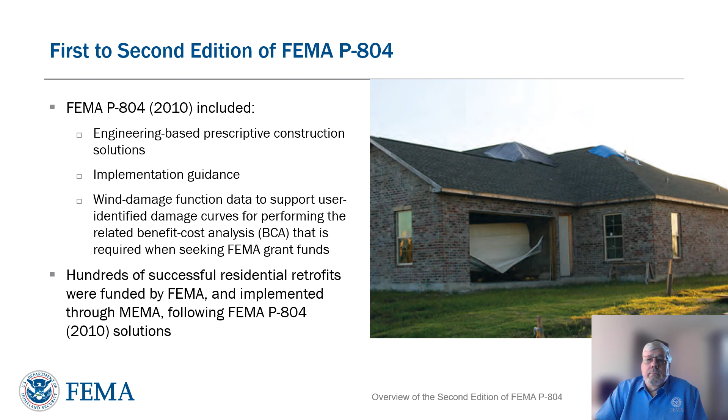Although many advances in building code resilience, adoption, and enforcement were made in Louisiana and nationally between Hurricane Katrina and Hurricane Ida's landfall 16 years later, Hurricane Ida caused damage and catastrophic failures to residential buildings of all ages in August of 2021, even though it was not a design-level wind event. This demonstrated the need for wind retrofit projects to help minimize future damage of residential buildings in hurricane-prone regions.

Therefore, it was decided that additional technical guidance through the update of FEMA P-804 was needed to facilitate the development of wind retrofit projects for residential buildings. The second edition of FEMA P-804 was published in April of 2023 and includes clarified and updated guidance based on post-damage assessments and lessons learned following the destruction hurricanes left behind over the past 12 years of observations, as well as research in the ever-growing field of wind engineering.

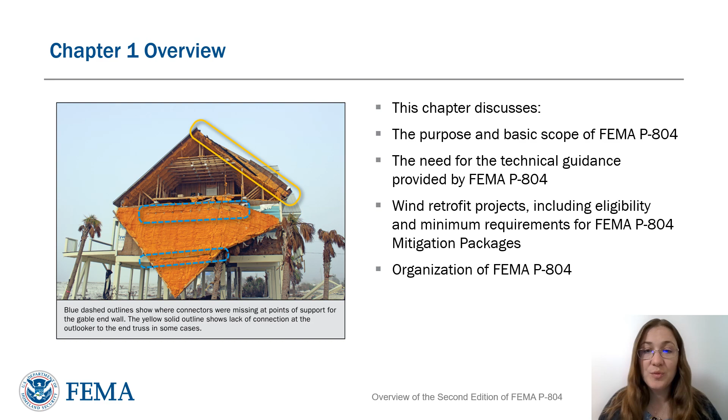The purpose of FEMA P-804 is to provide guidance on how to improve the wind resistance of existing 1- and 2-family dwellings, excluding townhouses and manufactured housing units, in hurricane-prone regions of the United States and its territories. Although the guidance is primarily intended to be applied in hurricane-prone regions as defined by ASCE 7-22, it may also be applied in non-coastal areas subject to high winds.

We've already touched on how every year homes in the hurricane-prone region are subject to high winds that cause extensive damage and threaten the safety and security of residents. But did you know that much of this wind-related damage can be reduced or prevented by improving the performance of homes through retrofits? So how does FEMA P-804 help with this? FEMA P-804 summarizes the technical information needed for selecting and implementing cost-effective FEMA-funded wind retrofit projects for existing 1- and 2-family dwellings in hurricane-prone regions of the United States and its territories.

FEMA's Hazard Mitigation Assistance Grant Program funds wind retrofit projects and requires those projects to meet the criteria in FEMA P-804. We will define and discuss what the hurricane-prone region is in the next chapter.

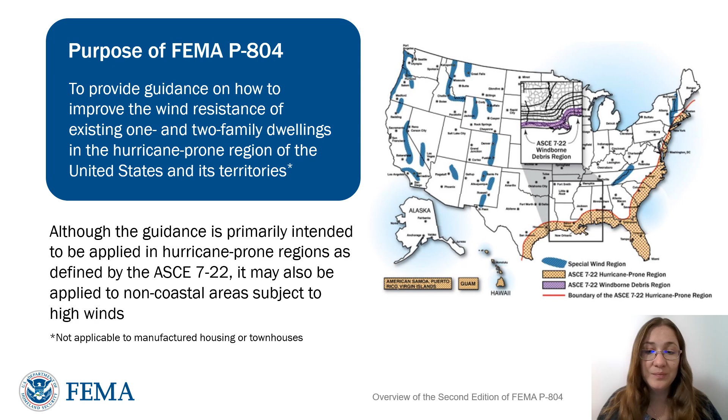Not only do residential wind retrofit projects reduce the vulnerability of and damage to houses from wind, but also from wind-driven rain. Wind-driven rain can occur during a long-duration high wind event such as a hurricane. In fact, FEMA has frequently documented this phenomenon during their mitigation assessment team field deployments after hurricanes. Even though there has been recent evidence of better structural performance for new construction built to more modern building codes, wind-driven rain has consistently caused extensive and costly water intrusion damage when it enters through damaged envelope components. Damaged envelope components can include roof coverings, wall coverings, roof ventilation components, soffits, and windows and doors. FEMA P-804 mitigation packages provide techniques to mitigate against wind-driven rain while also strengthening the structural integrity of the house.

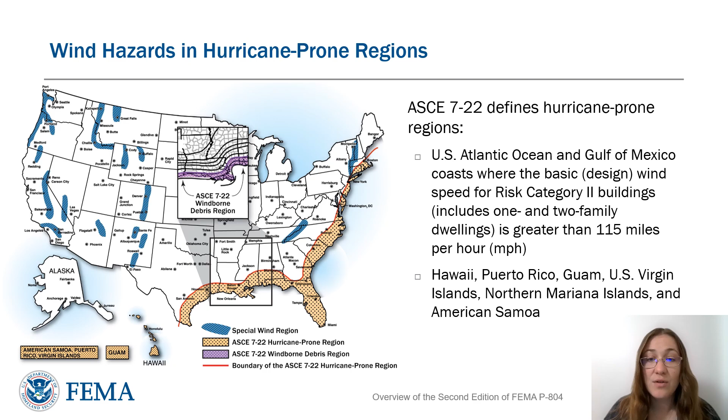High winds can produce large amounts of debris that may become windborne and perforate the building envelope and openings, which allow rain into the building and cause interior water damage. This damage can be extensive and costly and even lead to mold and mildew growth. Furthermore, a window or door perforated by debris may also allow wind pressures to increase within the house, leading to structural damage. Recent FEMA mitigation assessment teams have concluded again and again that wind-driven rain resistance requires special attention in the hurricane-prone region. The mitigation packages in FEMA P-804 take this into account.

While considering grant eligibility, there are no absolute geographical restrictions for where the mitigation packages in FEMA P-804 can be applied. This guidance in FEMA P-804, however, is geared towards houses in the hurricane-prone region. This is not to say some guidance is applicable to areas outside of the hurricane-prone region as well, but the guidance focuses on the unique hazards in the hurricane-prone region discussed on the previous slides.

The first bullet on the slide corresponds to a user note in FEMA P-804 that all wind speeds in the publication correspond to ASCE 7-22 3-second gust basic wind speeds for risk category 2 buildings. 1 and 2 family dwellings are risk category 2 buildings.

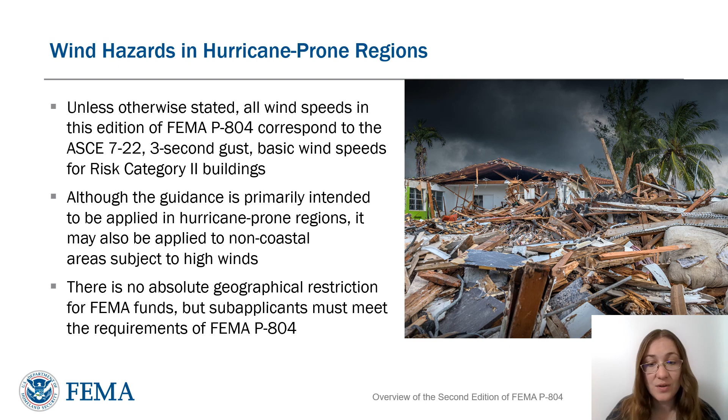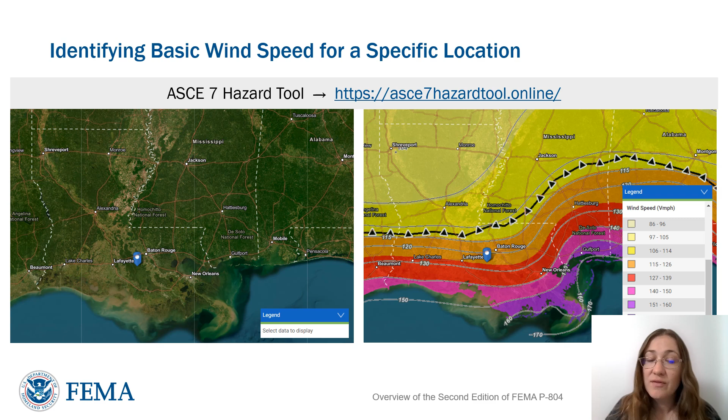One easy-to-use tool for defining the basic wind speed for a location down to the address is the ASCE 7 Hazard Tool. The tool can be accessed via the URL on this slide. Once you are there, you can enter a location and the tool will provide you with the basic wind speed for risk category 2 buildings from ASCE 7-16 and ASCE 7-22.

In addition to defining the risk to a house when considering a wind retrofit project, the existing level of protection of the house should also be determined. Over the past few decades, building codes have progressed towards addressing design and construction practices that will result in buildings that are more resistant to high winds. However, much of the existing building stock in the hurricane-prone region was designed and constructed to codes and standards that required far less than current codes to mitigate wind damage, or were constructed to no code at all. It is important for homeowners to be aware of the limits of the building code used to construct their house, the existing level of risk, and how and to what extent the risk can be mitigated.

Properly designing and constructing a building to a locally adopted building code provides a minimum level of protection for the wind hazard at a particular site for new construction. Homeowners can obtain information about both the effectiveness and limitations of the building code used to construct their house by using the resources listed here.

So how do modern building codes take the risk from wind into account? Many states and communities now regulate the construction of buildings by adopting and enforcing building codes. Most locally adopted building codes in the United States are based on model building codes. The 2021 edition of the model building codes are what FEMA P-804 references.

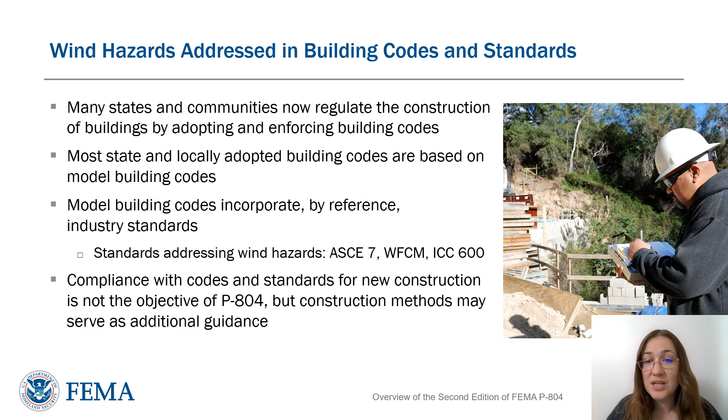The approaches to wind design in these model codes are based on modern wind engineering provisions of ASCE 7, as well as acceptable methods for enhancing wind hazard resistance. When considering residential construction and wind, the IRC also incorporates by reference other industry standards specifically recognized as accepted engineering practice for 1 and 2 family dwellings in high wind regions. Two examples are the American Wood Council's Wood Frame Construction Manual and ICC 600, Standard for Residential Construction in High Wind Regions. While compliance with codes and standards for new construction is not the subject of this guide, construction methods within these documents may serve as additional guidance for improving resistance to high winds.

The level of protection provided by a house can also be increased through the use of best practices. Post-disaster investigations of areas impacted by hurricanes, including those conducted by FEMA MATs, have identified buildings that performed poorly did not have roof and wall coverings capable of resisting high winds or the intrusion of wind-driven rain using sealed roof decks or similar mitigation. Protection for openings, such as windows, doors, garage doors, soffits, and vents to resist high winds, wind-borne debris, and wind-driven rain, applies both inside and outside of the wind-borne debris region. And a continuous load path for all loads, gravity, uplift, and lateral, must be passed from the building envelope to the ground through the foundation.

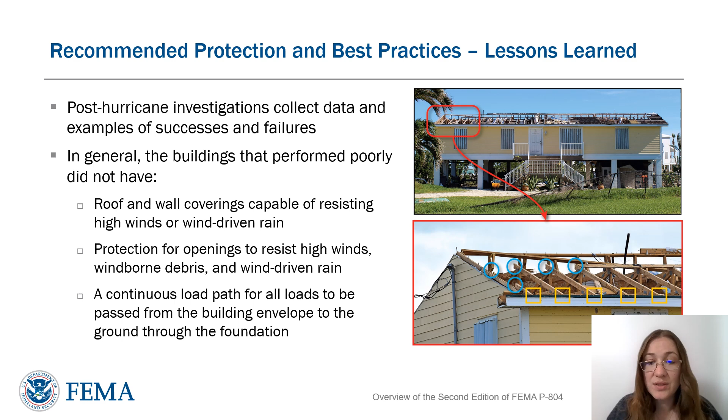FEMA P-804 presents mitigation packages that, if implemented correctly, will reduce the risk of damage to a residential building from a long-duration, high-wind event by avoiding common failure modes discussed on the previous slides, among others. However, there are several factors to consider in the decision-making process to implement wind retrofit measures, such as: is the risk level of the house high enough to make it a good candidate for a wind retrofit project? Which mitigation packages are cost-effective for the desired level of protection for the house? How much risk of wind-related damage is acceptable to the homeowner?

These factors and others are discussed in further detail in Chapters 3, 4, and 5 of FEMA P-804, along with the consideration of cost-effectiveness of mitigation projects. For more information, using FEMA's Benefit Cost Analysis Toolkit, Appendix C of FEMA P-804 provides a step-by-step guide on using the toolkit with the mitigation packages presented in this guide, as well as guidance on pre-calculated benefits.

To execute a successful retrofit on any house, an evaluation of its existing condition should be performed. This section of the presentation will provide an overview of how to do just that, while reviewing Chapter 3 of FEMA P-804 titled Evaluating Existing Houses. No two homes are exactly alike. During this section, we will discuss how to evaluate a home, what to determine when evaluating a home, mitigation package evaluations, developing an evaluation report, and deciding what level of protection to achieve with a retrofit project.

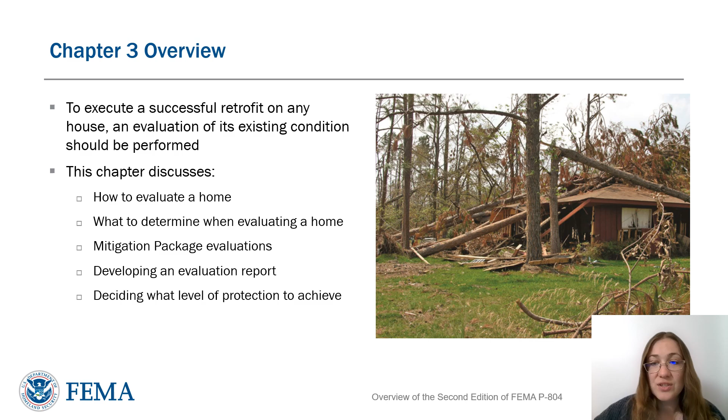IBHS's Fortified program requires evaluations of existing buildings to be performed by a certified Fortified evaluator. Therefore, homeowners who plan to seek FEMA funding for wind retrofits and wish to achieve 2020 Fortified Home Hurricane designation should use a certified Fortified evaluator to coordinate criteria across both programs. IBHS provides an online directory to help property owners find a certified Fortified evaluator on their webpage.

The success of a wind retrofit project depends on thorough evaluations. The purpose of the evaluation is to determine whether the house is a good candidate for any of the wind retrofit mitigation packages.

Regardless of which mitigation package is selected, the evaluation should cover the entire building envelope and conditions that would limit the effectiveness of the wind retrofit project. For example, if the wall covering is deteriorated, damaged, or not sufficiently fastened to the building, implementing a wind retrofit such as replacing windows or strengthening the gable ends will not provide the intended level of performance because other elements are likely to fail.

This example highlights two of the main questions that need to be answered during the evaluation: Do any repairs need to be made before undertaking a retrofit project? And is the house a good candidate for retrofit?

An evaluator should compile available documentation on the design and construction of the house, including upgrades. Any documentation on past evaluations, inspections, or installations should be compiled and noted. A physical walkthrough of the house should be conducted.

Section 3.1, as well as Appendix B of FEMA P-804, provide additional guidance on evaluating buildings before starting a wind retrofit project, including what should be documented in the building evaluation.

At the end of the collection of data and walkthrough, an evaluation report should be generated. The evaluation report should provide all reasoning and data used to support or not support the feasibility of the house for possible retrofit. More details on the evaluation report and what should be contained in it will be discussed at the end of this section.

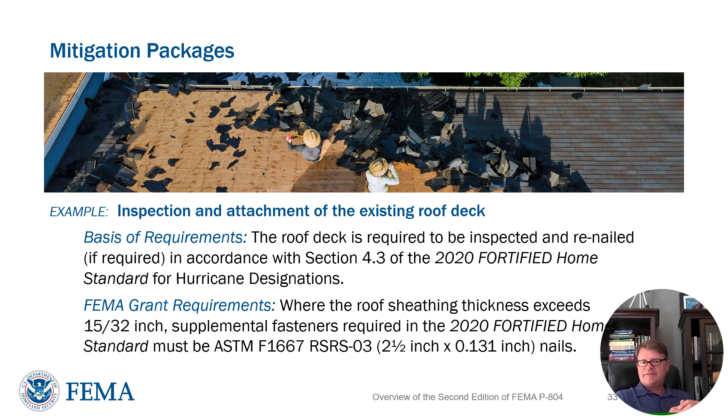The topics we're going to discuss: we're going to look at the key requirements in each mitigation package. We're not going to go through every single detail about every mitigation package, but we are going to discuss the key ones. Not all of them are going to be covered here. One of the most important things you can probably get from this presentation is that it's really important that you read all of what's in Chapter 4 of this guide and all of what's in the Fortified Home Standard. You can't use one without the other.

They're intended to work together. There are key things from P-804 that are going to apply to the project, and there are key things from the Fortified Home Standard that are going to apply as well. You need both of them. You can't have one without the other for a particular project complying with P-804.

We'll talk a little bit about the limitations of prescriptive solutions. There are a number of prescriptive solutions within Fortified, and there are also a couple of other ones in the I-codes that are referenced by P-804. What those limitations are.

They're usually limited by wind speed, exposure category, but they also may be limited by building mean roof height and some other geometric factors as well. And then also there's minimum design requirements and testing requirements. So for example, if something has to be designed by a registered design professional, there's a minimum wind speed and minimum exposure category for a lot of the retrofits, not all of them, but for some of them.

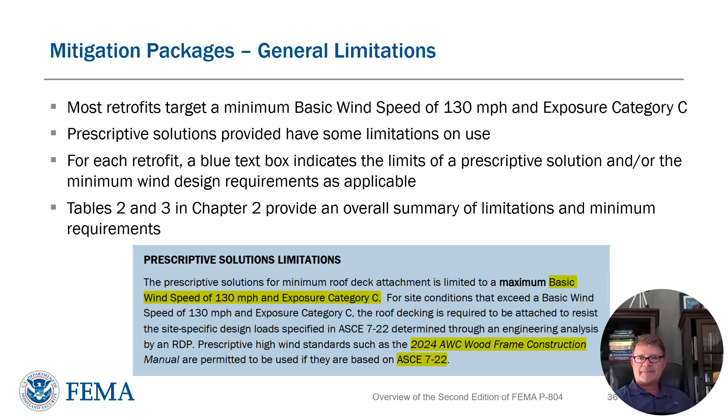Let's talk a little bit about exposure categories, because you'll see exposure categories mentioned in P-804. You'll also see it mentioned in IBHS fortified standard. What exactly do these exposure categories mean?

Exposure categories, from a wind design standpoint, are really a way to capture what the roughness of the Earth's surface is. The rougher the surface, the more it affects the flow of air as wind blows over the Earth's surface. The less rough, the less it affects the air, and all things being equal, the higher wind speeds will be a little bit higher for less rough surfaces than a similar type event for more rough surfaces.

We account for these differences in roughness by defining 3 exposure categories: exposure category B, exposure category C, and exposure category D. We'll talk about exposure category D on the next slide. What we have in P-804 are general descriptions of exposure categories. You'll really need to go to ASCE 7 to get the more specific details about how to determine what exposure category the site is in, and it can be a little bit complicated. But these general definitions we provide here are intended to just give you an idea of the types of exposure categories that would apply in the hurricane-prone region.

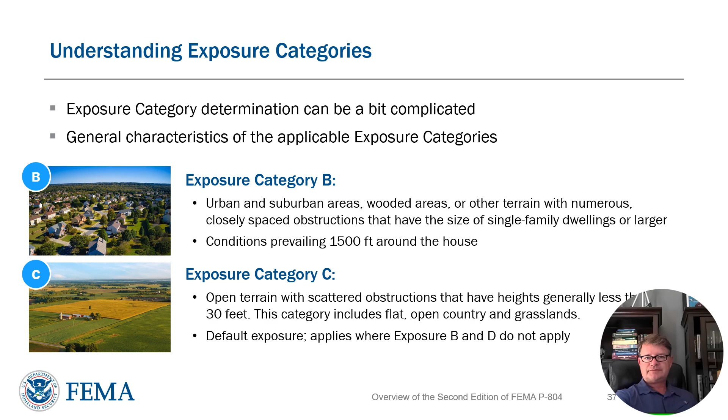Exposure category D is the condition where a building is exposed to wind flowing over open water. It has to be a large body of water, with a width of at least 5,000 feet, and that exposure D condition extends inland, or downwind if you will, for a distance of 600 feet or 20 times the height of the building. Now, for single-family dwellings, for houses, the 600-foot transition is what's going to control. So if you're located within 600 feet of a body of water that's at least 5,000 feet in width, then you're going to qualify for exposure category D.

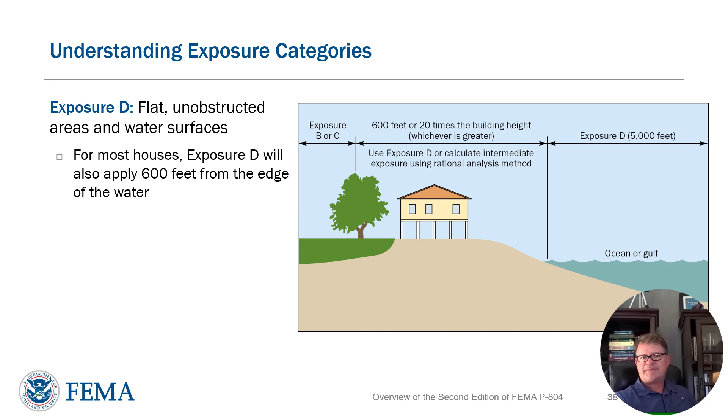All right, so let's get into some of the nuts and bolts of the mitigation packages. We'll start with the basic mitigation package. As the title indicates, it is the most basic package of the packages in P-804. It focuses on securing the roof components, such as the roof covering, the roof decking, and underlayment, depending on which option you choose, and also improving the water intrusion resistance of the roof. The basic mitigation package generally does not require the use of a registered design professional, such as an engineer or architect, to complete. Now, there are 2 options.

There's option 1, which applies where the existing roof covering is not being removed. There's a set of improvements that are recommended for option 1, and then option 2 would apply where the roof covering is being removed and replaced. Generally, option 2 is the preferred method for a couple of reasons. One is when you remove and replace the roof covering, you have access to inspect the roof deck, check the fastener size, fastener spacing, also look for any rot or deteriorated roof decking. And secondly, when you remove the old roof covering, you're going to put a new roof covering on, and it's going to be fastened and meet current building code requirements at the minimum level required by P-804 and fortified.

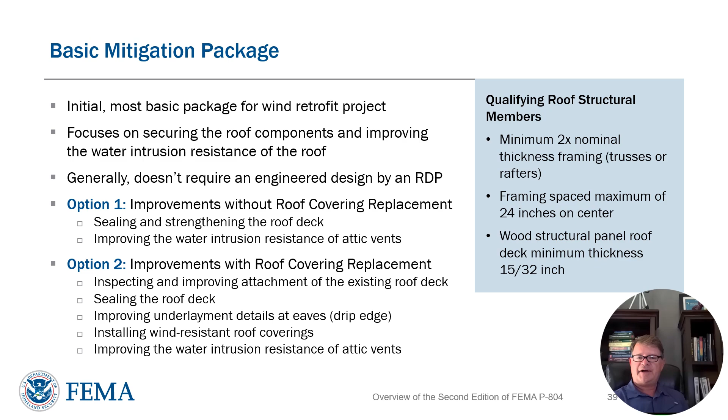All right, basic mitigation package option 1. Again, this one applies where the roof covering is not being removed and replaced. So if we got to strengthen and seal the roof deck and the roof covering is staying in place, we're going to have to strengthen and seal it from the underside of the deck instead of on the top, like we will with option 2, as we'll see in a few minutes.

But we do this on the underside by applying a 2-part spray polyurethane foam adhesive in the attic to the underside of the roof deck. It's very important that that spray polyurethane foam adhesive be applied in essentially every nook and cranny in the attic. It needs to be applied at the roof deck, at the joints between the roof sheathing panels, and all intersections between the roof deck and roof framing members. Now, this type of adhesive has specific performance requirements identified regarding core density and design uplift pressure that the product has to be capable of resisting. But that foam adhesive for basic mitigation option 1 is going to be used to seal and strengthen the roof deck.

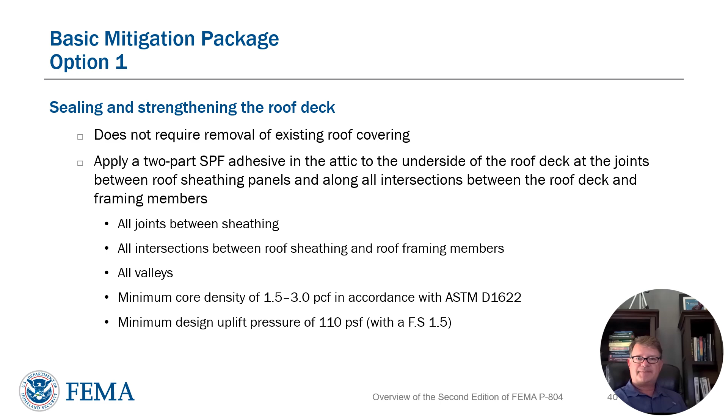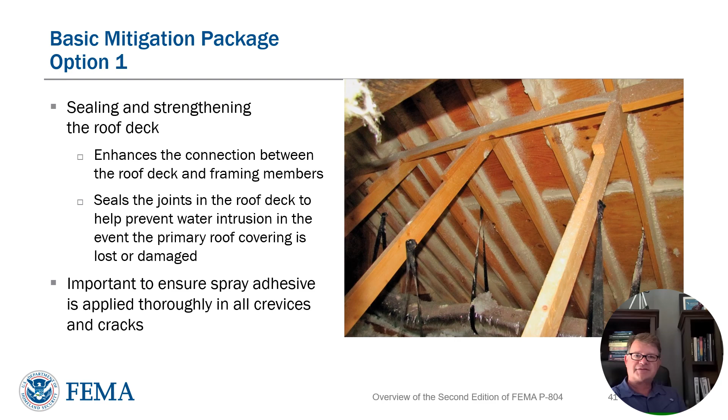Sealing those joints is what's going to help prevent water intrusion in the event that the primary roof covering is lost. The final thing you have to do with option 1 relates to protecting ventilation components into the attic. Up until a few years ago, most attics had some type of ventilation, and many still do, although the unventilated or unvented attic option is becoming increasingly popular. These ventilation components can allow wind and wind-driven rain to come into the attic area, so they have to be protected in some form or fashion.

Ridge vents and off-ridge vents are required to be tested in accordance with a Florida standard called TAS 100A. It comes from the high velocity hurricane zone in the Florida Building Code, which is Dade and Broward counties, or the old South Florida Building Code. TAS 100A tests these attic ventilation components for wind-driven rain. So for basic option 1, ridge and off-ridge vents will have to be tested to TAS 100A.

Now for gable end vents, they're required to be protected with a removable shutter, which will also protect from wind-driven rain entering the attic area. There is a prescriptive solution within Fortified for using wood structural panel to cover gable end vents.

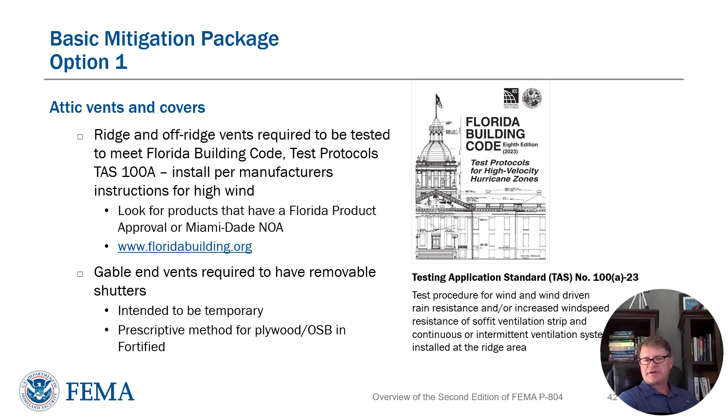Option 2 of the basic mitigation package is a little bit more involved than option 1. In option 2, we're removing the existing roof covering, so we have access to the roof deck, and we can inspect the deck thickness and the fastening of the deck to the roof framing.

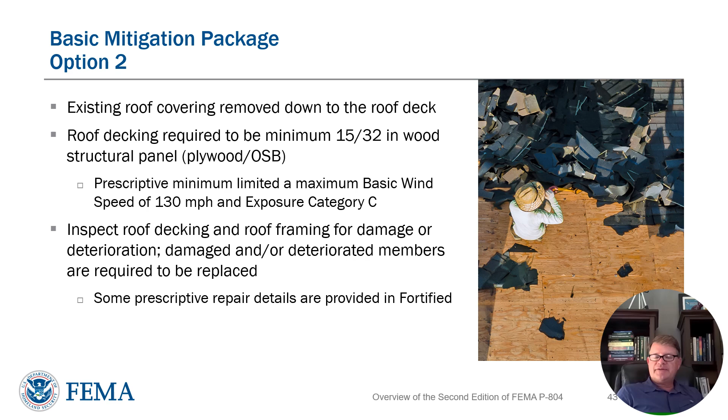For option 2, the roof deck has to be a minimum of 15/32 inch wood structural panel, which is plywood or OSB. That minimum thickness is predicated on a basic wind speed of 130 miles per hour and exposure category C. For site conditions that exceed that, you'll need to use a registered design professional or one of the prescriptive standards, such as the Wood Frame Construction Manual, based on ASCE 7-22, to determine the minimum roof deck thickness. You'll also want to inspect the roof deck for any damage or deterioration. Look for water damage. There are some prescriptive repair options within Fortified that may be used for certain conditions.

One of the key elements of option 2 of the basic mitigation package is securing the roof deck. The roof deck will have to be secured by adding additional fasteners, or re-nailed, as it's called. These additional fasteners are 2 3/8 inch long ring shank nails, and they are to be spaced at 4 inches on center throughout the entire roof. If the existing roof can be shown to meet these requirements, then this re-nailing is not required.

Now, there is a FEMA grant requirement on this retrofit. Where the roof sheathing thickness exceeds 15/32 of an inch, FEMA P-804 requires the use of a 2.5 inch long ring shank nail, called the RSRS03 nail. But that only applies where the roof sheathing thickness exceeds 15/32 of an inch. Where it's 15/32 of an inch, it's not allowed to be less, but the 2 3/8 ring shank nail, as specified by Fortified, can be used.

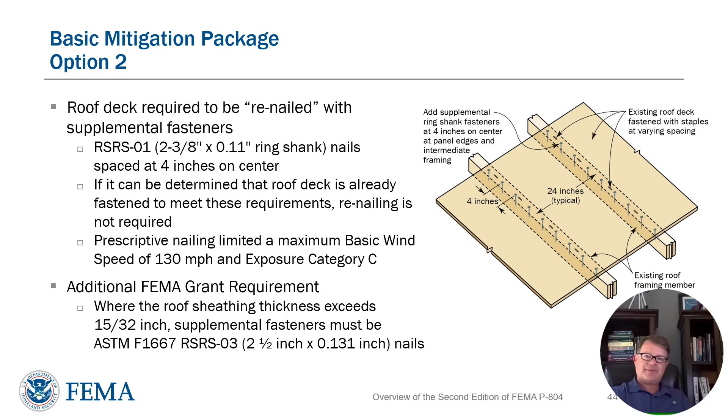After securing the roof deck, the next retrofit is to seal the roof deck. When the primary roof covering is lost or damaged, the roof deck becomes particularly susceptible to water damage due to gaps between the decking. Employing a sealed roof deck will significantly reduce water intrusion through the roof deck when the primary roof covering is lost or damaged.

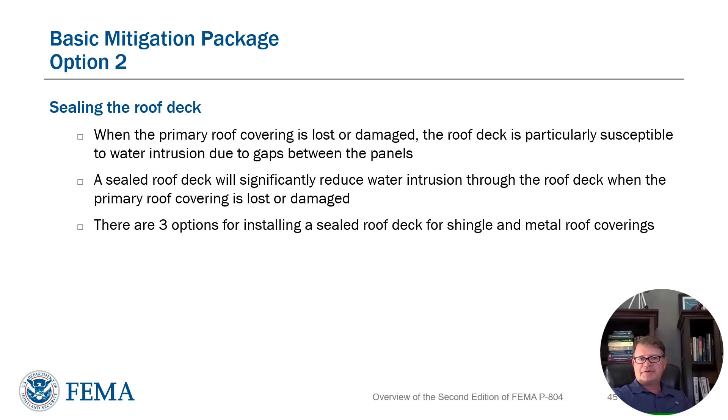In P-804 and Fortified, there are 3 options for installing a sealed roof deck for asphalt, shingle, and metal roof coverings. Sealed roof deck option 1 includes a combination of traditional roofing underlayment materials and a 4-inch wide strip of self-adhering tape covering all joints in the roof deck.

This tape is required to comply with ASTM 1970 or AAMA 711. The tape is required to be covered with felt underlayment, complying with ASTM 226 Type 2 or ASTM 4869 Type 3 or Type 4. This underlayment is required to be fastened at all laps at 6 inches on center, and in between laps at 12 inches on center in a 12-inch grid pattern. The fastener specified is a ring shank fastener using metal or plastic caps.

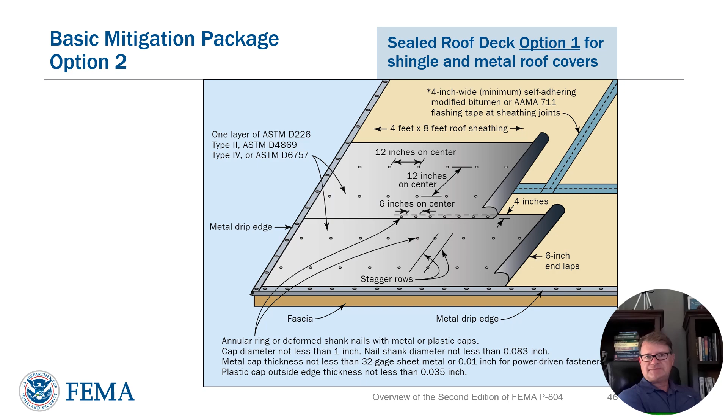Option 2 for sealing the roof deck for shingle and metal roof covers is very similar to historically how underlayment has been applied to low slope roofs. It essentially requires a double layer system of underlayment.

Underlayment has to comply with ASTM D226 Type 2 or ASTM D4869 Type 3 or Type 4, and it's applied in a fashion where the entire roof is covered with a minimum of 2 layers of underlayment. The underlayment is fastened at the laps at 6 inches on center, and then in a 12-inch grid pattern between the laps. The type of fastener required is very similar to what we described for option 1. It's a ring shank roofing nail using metal or plastic caps.

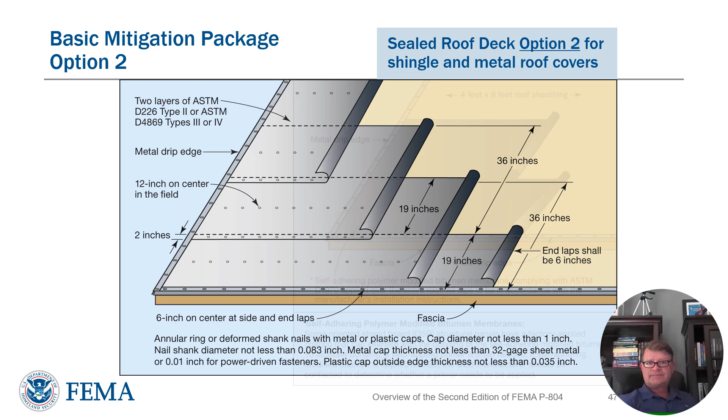Option 3 for sealing the roof deck is really the most popular method that's used to seal the roof deck. It requires the use of a polymer modified bitumen product that complies with ASTM D 1970, and it adheres directly to the roof deck. Testing by IBHS has shown that this method is one of, if not the most effective method in reducing water intrusion through the roof when the primary roof covering is lost or damaged due to a windstorm.

You will have to pay attention if the roof deck is OSB. Many OSB manufacturers apply a coating in the factory to their product, and this coating can inhibit the ability of the self-adhered product to bond to the deck. So in a lot of cases, you're going to have to apply a primer. You'll need to contact the OSB manufacturer, determine if a primer is required, and determine what type of primer you will need.

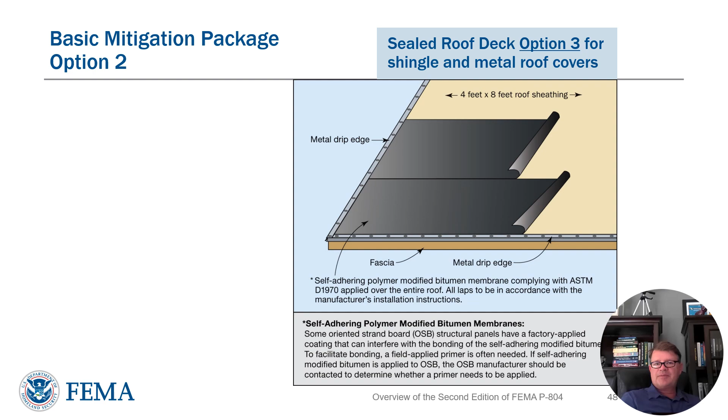The last couple of slides we've talked about sealed roof deck options for shingle and metal roof coverings. For tile roofs, the options for sealing the roof deck are very similar. Option 1 includes a combination of taping the joints with a self-adhered product complying with ASTM D 1970 or AAMA 711, and an anchor sheet, and then a self-adhered cap sheet. Option 2 involves the use of a self-adhered underlayment applied directly to the deck.

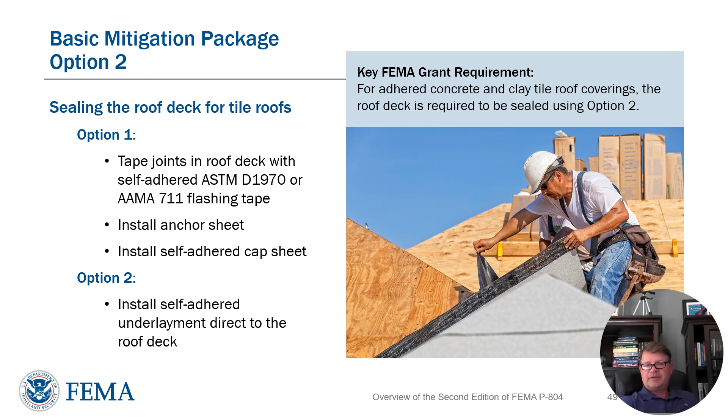There's a notable FEMA grant requirement that pertains to tile roofs. That is that for adhered concrete and clay roof tile, sealed roof deck option 2, the self-adhered underlayment direct to deck, will have to be used.

After the sealed roof deck is installed, a drip edge is required at all eaves and all rakes. The drip edge is required to be installed over the underlayment and fastened at 4 inches on center. The drip edge is also required to be sealed with a compatible sealant or compatible cement. For asphalt shingle roofs, a self-adhered starter strip is also permitted to be used.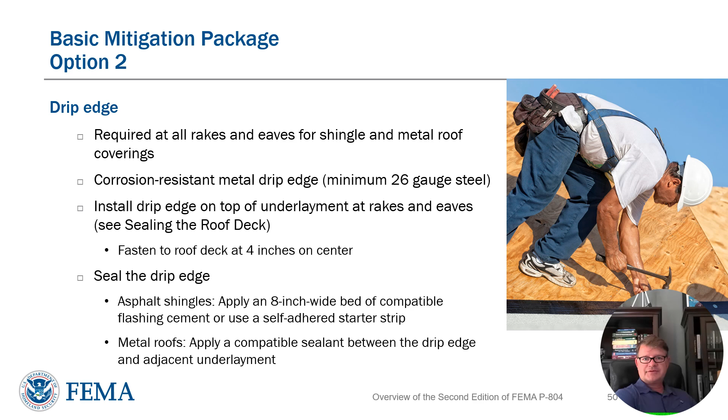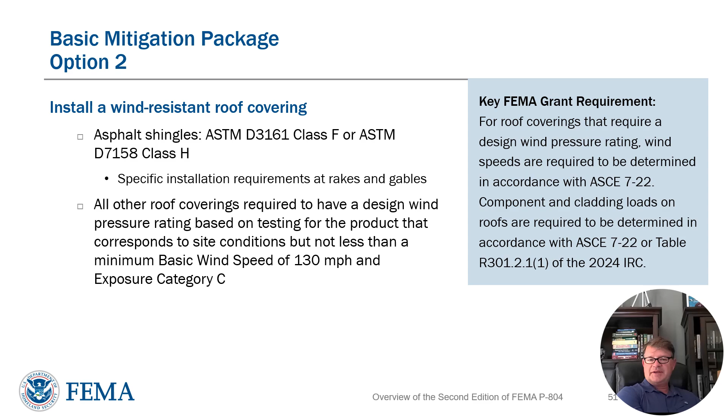Next, a wind-resistant roof covering is required to be installed. Asphalt shingles are required to comply with ASTM D3161 Class F or ASTM D7158 Class H. All other roof coverings are required to have a design wind pressure rating that equals or exceeds the site conditions, but not less than the design pressures based on a basic wind speed of 130 miles per hour and an exposure category C. An important FEMA grant requirement to this section is that wind speeds have to be determined in accordance with ASCE 7-22.

The final retrofit for option 2 of the basic mitigation package is the same as the final retrofit for option 1 in the basic mitigation packages, in that the attic ventilation openings need to be protected. Ridge and off-ridge vents will have to be tested in accordance with TAS 100A. We talked about that on a previous slide. And then also gable end vents need to be covered with a removable shutter.

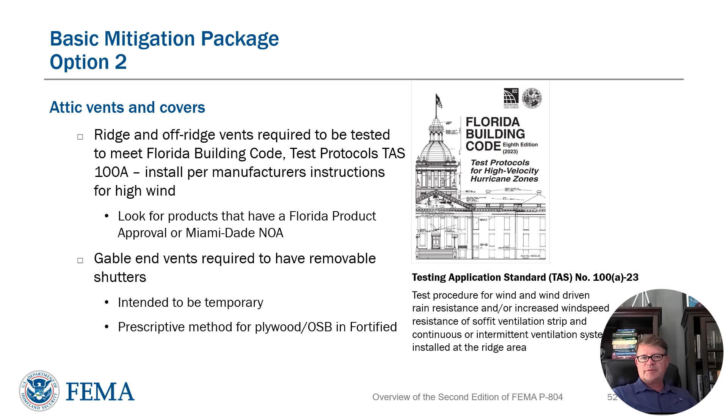Now let's talk about the intermediate mitigation package. The intermediate mitigation package builds on the basic mitigation package. Whereas the basic package primarily covered retrofits for roofs, the intermediate mitigation package is a set of structural retrofits. This package includes protecting windows and doors from windborne debris, installing wind-resistant garage doors, protecting garage doors with glazing from windborne debris, strengthening gabled end walls, strengthening soffits, strengthening chimney attachments, and strengthening connections of attached structures.

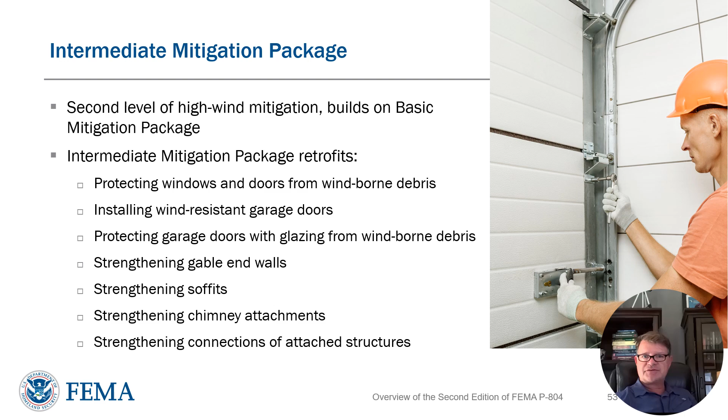Let's talk a little bit about opening protection from windborne debris. FEMA P-804 and Fortified require all windows, skylights, entry doors, and garage doors with glazing to be protected from windborne debris. This protection can be in the form of an impact-resistant product, such as an impact-resistant window or door, or it can be an impact-resistant covering that protects a window or a door.

The impact-resistant products or coverings have to be tested in accordance with ASTM E1886 and ASTM E1996, or the Florida Building Code Test Protocols TAS 201 and TAS 203.

There's a key FEMA grant requirement related to opening protection. While Fortified permits the use of wood structural panels for protection of windows where the basic wind speed is less than 130 miles per hour, P-804 does not allow wood structural panels, which could be OSB or plywood, to be used as protection for any basic wind speed.

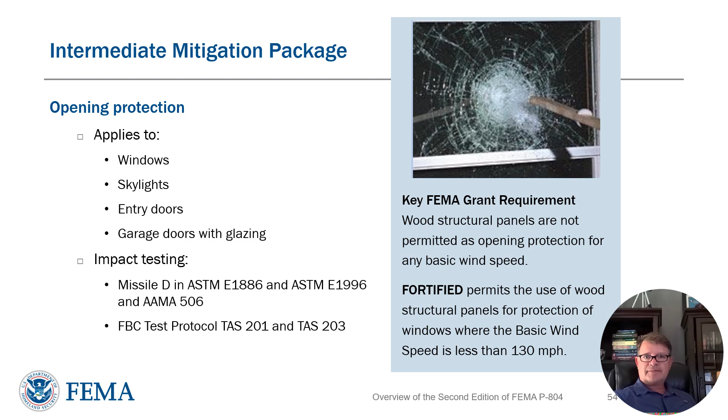For impact-resistant products and coverings, it's important that the product labels are maintained until the retrofits have been inspected. Some products have permanent labels and others have temporary labels that can be removed. It will be difficult to verify that the product is impact-resistant without a label. The image on the right of this slide is a typical impact-resistant window label.

This is a temporary label and it can be removed. It tells us that the product was tested to ASTM E1886 and ASTM E1996 using Missile D. It also indicates other important information about the product, including its design wind pressure rating.

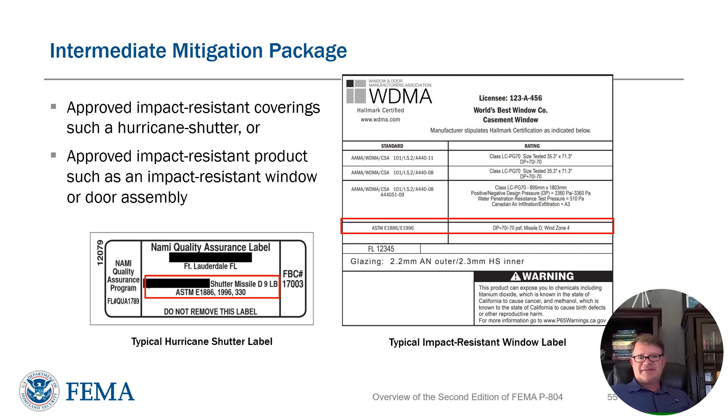The image on the left is a typical label for a hurricane shutter. It also indicates that this product was tested to ASTM E1886 and ASTM E1996.

While the intermediate mitigation package requires garage doors with glazing to be protected from windborne debris, it also requires all garage doors with or without glazing to have a design wind pressure rating for the site condition, but not less than a basic wind speed of 130 miles per hour and exposure category C.

Similar to windows and shutters, building codes require garage doors to have a label indicating certain performance requirements. A typical garage door label is shown on this slide. This label indicates that this garage door has a design wind pressure rating of positive 30 psf and negative 33 psf. It also indicates that this door is impact rated in accordance with ANSI DASMA 115, which is the impact standard for garage doors.

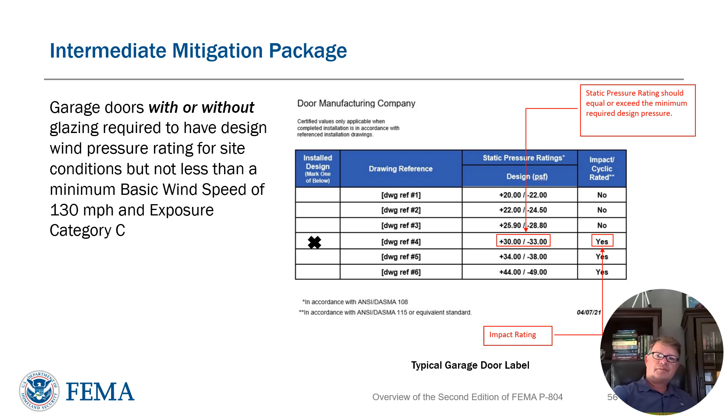Gable end wall retrofits are an important part of the intermediate mitigation package. Gable end walls are particularly vulnerable to out-of-plane wind loads because of the hinge created at the intersection of the triangular portion of the gable and the top of the wall below.

Gable end wall bracing will typically need to be designed by a registered design professional. The bracing method chosen must be capable of resisting wind loads for the site conditions, but not less than a minimum basic wind speed of 130 miles per hour and exposure category C.

Prescriptive solutions are permitted in accordance with Appendix C of the 2024 IEBC or Chapter 17 of the 7th edition 2020 Florida Building Code Existing Building. However, FEMA grant requirements apply an extensive set of limitations on using the prescriptive solutions. We'll discuss some of these limitations on the next few slides. If any of these limitations are exceeded, design of the bracing by a registered design professional is required.

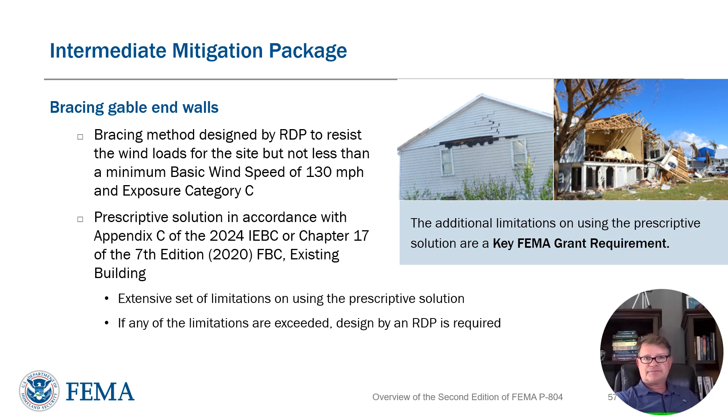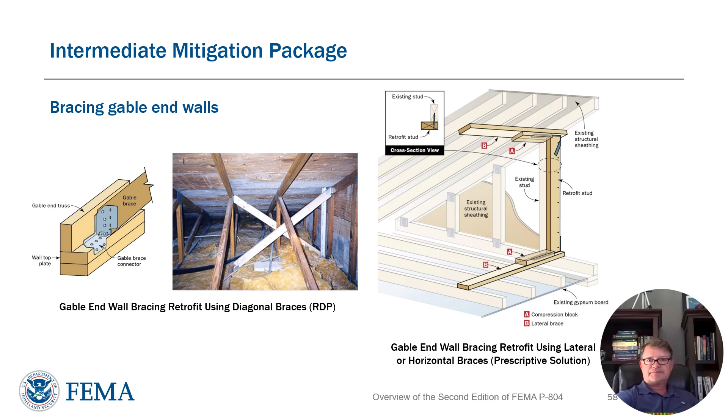As previously mentioned, there's an extensive set of limitations on using the prescriptive solution in the 2024 IEBC or the 7th edition 2020 Florida Building Code Existing Building that fall under FEMA grant requirements. General eligibility conditions are covered in Appendix C of the IEBC and Chapter 17 of the Florida Building Code Existing Building. If these eligibility conditions are not met, the prescriptive solutions cannot be used.

Additional limits for FEMA grant requirements include: the mean roof height cannot exceed 33 feet, the site condition is limited to exposure category B or C, and the height of the wall beneath the gable cannot exceed 10 feet. Where a gypsum board ceiling diaphragm is used to brace the gable end wall, the minimum length of the gypsum board ceiling diaphragm is required to be in accordance with Table 4, which we'll take a look at in a few minutes.

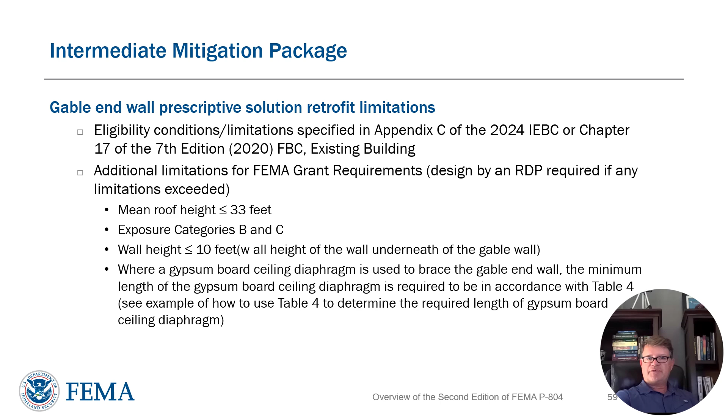Further limitations include that fastening and blocking of the gypsum board ceiling is required to be verified or retrofitted to meet the minimum criteria specified in the 2024 International Residential Code for gypsum board diaphragm ceiling assemblies. The horizontal braces specified in the 2024 IEBC are required to be continuous along the required length of ceiling diaphragm as determined by Table 4, or be spliced together as permitted for interrupted horizontal braces along the required length of the ceiling diaphragm as determined by Table 4.

Similarly, the lateral braces specified by the 7th edition 2020 Florida Building Code Existing Building are required to be continuous along the required length of the ceiling diaphragm as determined by Table 4, or be spliced together as permitted for interrupted lateral braces along the required length of the ceiling diaphragm as determined by Table 4.

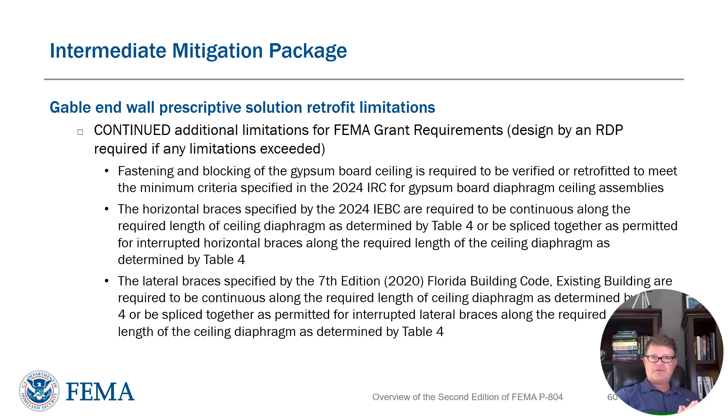Now let's take a look at Table 4.

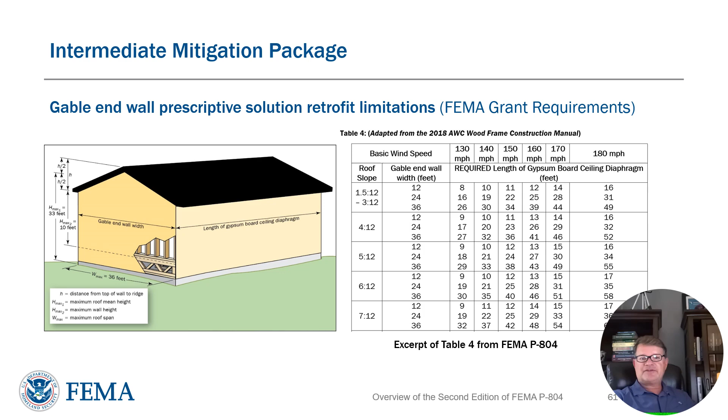For example, a building with a roof slope of 5 and 12, located where the basic wind speed is 150 miles per hour, and having a gable end width of 24 feet, would require a minimum gypsum board ceiling diaphragm length of 24 feet. Again, if any of these limitations specified in the FEMA grant requirements or the eligibility conditions specified in the 2024 IEBC or the 7th edition 2020 Florida Building Code Existing Building are exceeded, the prescriptive solution is not permitted to be used, and gable end wall bracing will have to be designed by a registered design professional.

All right, next let's talk about retrofitting soffits. The poor performance of soffits continues to be an issue in windstorms such as hurricanes. When soffit panels fail, wind and wind-driven rain can enter the attic area and cause significant interior water damage to a home. Recently, building code requirements have been strengthened to improve soffit performance. These building code changes generally align with the retrofit requirements in FEMA P-804.

For the intermediate package, the condition of the existing soffit, if present, should be evaluated. If it's in good condition, the existing soffit can be used if it can be determined that it is capable of resisting wind loads for the site, but not less than wind loads determined using a wind speed of 130 miles per hour and exposure category C. Admittedly, this will be difficult to determine for many soffits.

If the soffit is constructed of wood structural panels, the panel thickness, nail size, and spacing can likely be determined and can be analyzed for wind load resistance. However, other soffit panel products such as vinyl or fiber cement board are typically not labeled. Without some type of label on the product, it will be difficult to determine the wind load resistance of a soffit panel product. While Fortified permits the existing soffit panel to be used if it is in good condition, a FEMA grant requirement in P-804...

...requires the soffit panel to be capable of resisting wind loads for the site, but not less than wind loads determined using a basic wind speed of 130 miles per hour and exposure category C, regardless of the condition of the existing soffit. Additionally, aluminum soffit panels are not permitted to be used within 3,000 feet of the coast due to the corrosive effects of salt-laden air.

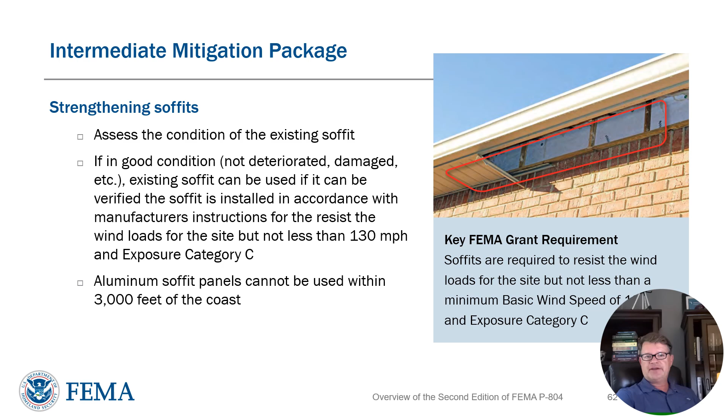To reiterate, if the manufacturer of the soffit panel cannot be identified, so that you can verify that the panel meets the minimum design wind load specified in P-804, or if it's not in good condition, the soffit will have to be replaced. The new soffit panels must be capable of resisting a design wind pressure for the site, but not less than wind loads associated with a basic wind speed of 130 miles per hour and exposure category C.

The design wind loads on soffits will have to be determined using ASCE 7-22, or alternatively, the simplified method in Table R301.2.1(1), in the 2024 IRC could also be used. Soffit must be attached at both ends, meaning at the wall and at the fascia board. And if the soffit span exceeds 12 inches, intermediate supports are required so that no span of the soffit exceeds 12 inches.

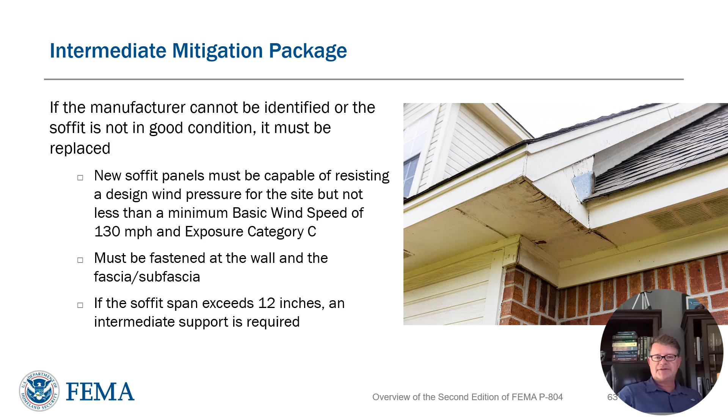A few important notes about vinyl soffit panels. The use of vinyl soffit panels is common because they are inexpensive and relatively easy to install. However, there are a couple of key installation requirements I'd like to share with you.

Vinyl soffit panels are required to be fastened at both ends of the soffit panel, meaning at the fascia board and at the wall to framing or some other wood support such as a ledger. It is common practice to only fasten the soffit at the fascia board and float the other end of the panel in a vinyl siding accessory channel. While this method is common because it's easy to install, it does not offer good resistance to wind loads, as has been noted by numerous FEMA MAT reports.

Another key issue for vinyl soffit panels is the span of the panel, the distance from the wall to the fascia board. If this distance exceeds 12 inches, intermediate supports are required to be provided so that the soffit panel span does not exceed 12 inches.

For wood structural panel soffits, P-804 permits the use of a prescriptive solution in the 2024 IRC. This prescriptive solution specifies a minimum panel thickness, minimum nail size, and minimum nail spacing to achieve a specific design wind pressure. The required design wind pressure will have to be determined using ASCE 7-22, or as mentioned previously, the simplified method in Table R301.2.1(1) in the 2024 IRC.

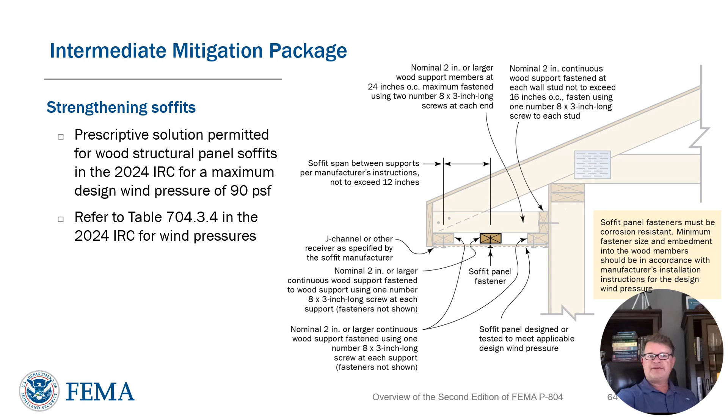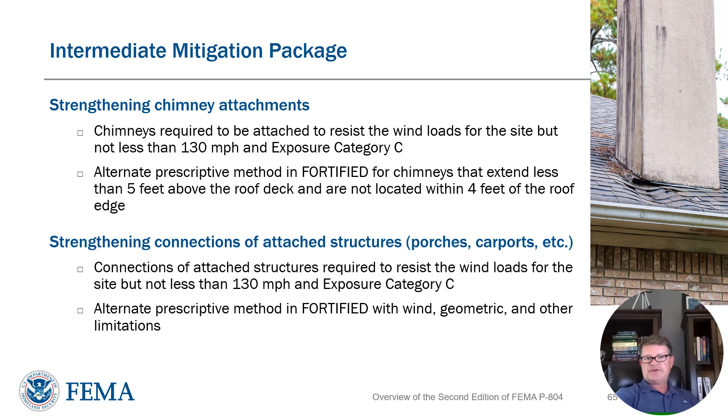must be capable of resisting design wind loads for the site conditions, but not less than those determined using a basic wind speed of 130 miles per hour and exposure category C. Similar to the chimney connection retrofit, an alternate prescriptive method in Fortified can be used within the wind, geometric, and other limitations specified.

All right, let's talk about the third and most comprehensive mitigation package, which is the advanced mitigation package. This package builds on the intermediate mitigation package, and as we mentioned earlier, with the packages being cumulative, to qualify for the advanced mitigation package, you will have to complete the basic mitigation package, the intermediate mitigation package, and the additional requirements in the advanced mitigation package.

The retrofits in this package, parts of them tend to be fairly invasive. Most of the time they're best done during a major renovation or storm repair. A couple items in the advanced mitigation package include wind pressure resistance for openings, exterior wall impact resistance, and developing a continuous load path throughout the structure.

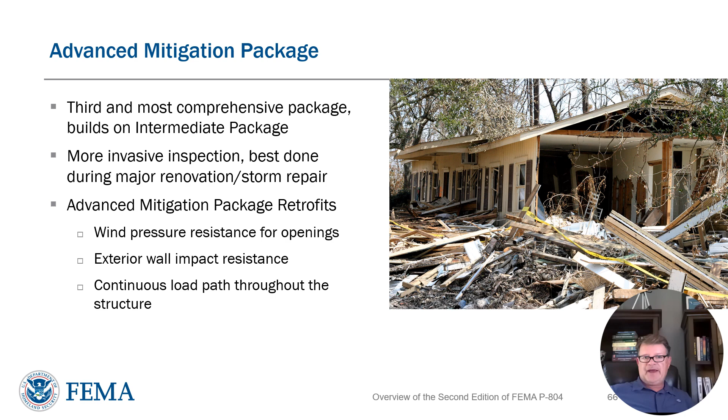For the advanced mitigation package, all openings are required to have a design wind pressure rating for the site conditions, but not less than that for a minimum basic wind speed of 130 miles per hour and exposure category C. Windows, doors, and skylights are required to be tested in accordance with the AAMA/WDMA/CSA 101/I.S.2/A440 standard, which is often referred to as the North American Fenestration Standard, or NAFS, or tested in accordance with the Florida Building Code Test Protocol TAS 202.

These standards test these products for wind load resistance, water penetration resistance, and air infiltration, in addition to other operability tests. A key FEMA grant requirement is that all windows, doors, and skylights are required to have a PG rating in accordance with NAFS that corresponds to the required positive design wind pressure rating.

The PG rating is usually limited by the water penetration resistance of the products. By ensuring that the PG rating matches the positive design wind pressure rating, this confirms that the product was tested for water penetration resistance at 15% of the positive design wind pressure rating, which is what is specifically required in TAS 202. Garage doors are required to be tested in accordance with DASMA 108, ASTM E330, or TAS 202.

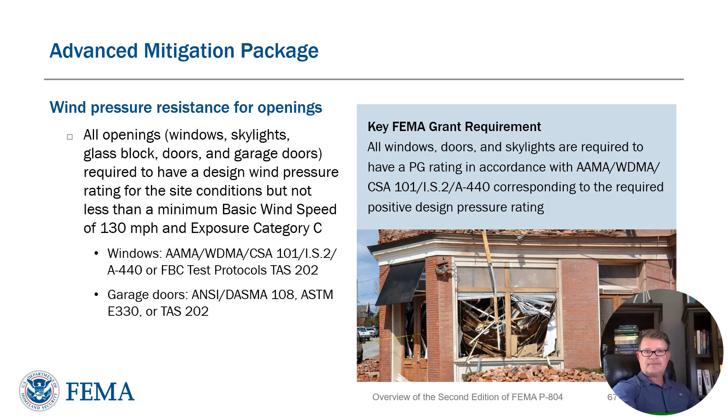As we discussed for impact-resistant products and coverings, it is important that the product labels are maintained until the retrofits have been inspected. Some products have permanent labels and others have temporary labels that can be removed. It will be difficult to verify that the product has an appropriate design wind pressure rating without a label.

The image on this slide is a typical window label. This is a temporary label and it can be removed. It tells us that the product was tested to what we refer to as the NAFS standard and indicates that the design wind pressure rating is positive 70 psf and negative 70 psf. It also indicates that the PG rating of the product is PG 70. A key FEMA grant requirement is that the windows have a PG rating that equals the positive design wind pressure rating.

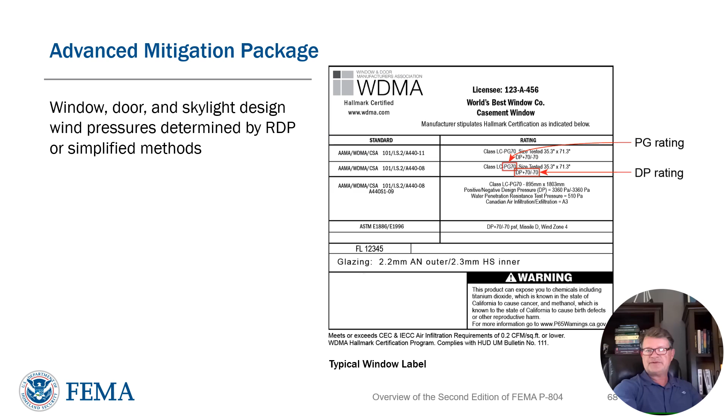Similar to windows and doors, garage doors need to be inspected to ensure that the label indicates a design wind pressure rating for the site, but not less than wind loads determined using a basic wind speed of 130 miles per hour.

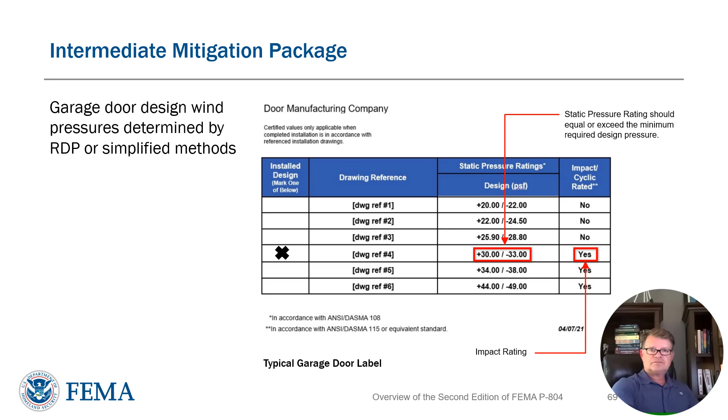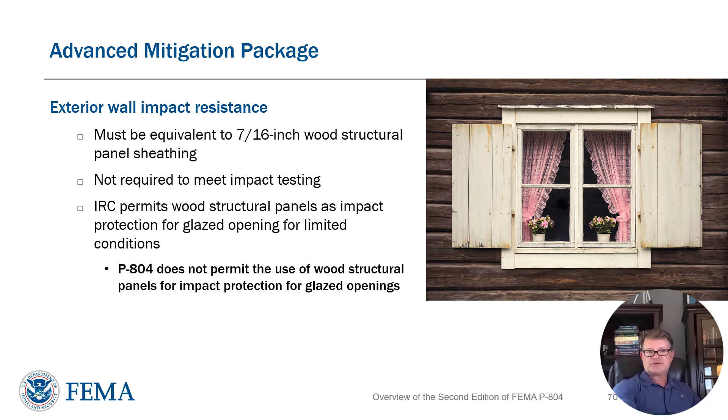The advanced mitigation package also requires exterior walls to have a basic level of impact resistance. The minimum impact resistance must be equivalent to the impact resistance provided by a 7/16 inch wood structural panel sheathing. Exterior walls are not required to be tested for impact, but they are required to have a basic level of impact resistance. It's important to note that while the IRC permits the use of 7/16 inch wood structural panels as opening protection where wind speeds are less than 130 miles per hour, P-804 does not permit the use of wood structural panels to protect openings from windborne debris.

The final retrofit we'll discuss in the advanced package, and consequently the most difficult one, is providing a continuous load path from the roof to the foundation. This is the most invasive retrofit. Access is difficult without removing existing materials. It's typically best done during a major renovation or storm repair. It's required to be designed by a registered design professional.

Appendix G and Fortified list the minimum elements that must be inspected and assessed by a registered design professional. Connections are required to resist wind loads for the site, but not less than a minimum basic wind speed of 130 miles per hour and exposure category C.

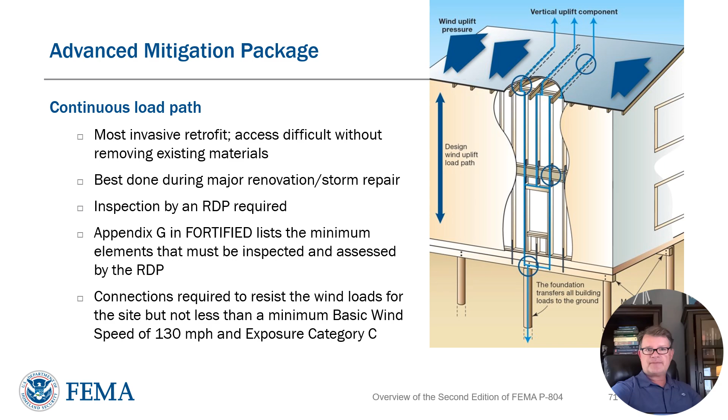FEMA P-499, the Home Builder's Guide to Coastal Construction, Technical Fact Sheet number 4.1, which covers load paths, and Technical Fact Sheet 4.3, which covers the use of connectors and brackets, both provide guidance on the concept of a continuous load path through the house. Connections are typically the critical components when developing a continuous load path. Additionally, FEMA P-55, the Coastal Construction Manual, provides more detailed guidance and examples of each link through the continuous load path. A solution should be followed that starts at the top of the house, at the roof sheathing, implementing an appropriate fastening schedule and attachment to the roof framing members, and continuing to the foundation.

Okay, this concludes this segment. I will now turn the presentation back over to Sam to discuss implementing these mitigation projects.

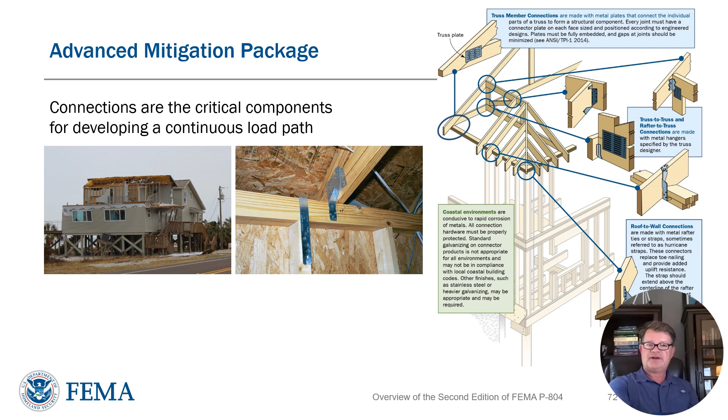Thanks, Eric. This final chapter of FEMA P-804, Implementing Mitigation Projects, offers guidance for implementing residential building wind retrofit projects and potential funding sources. And finally, before I wrap up, I will also provide you with a resource to ask any questions you may still have about FEMA P-804 and other FEMA building science resources.

In addition to touching on several federal, state, and nonprofit retrofit programs that are currently available to homeowners and local governments, Chapter 5 also identifies factors to consider for wind retrofit projects, including building code compliance, local permitting and inspection requirements, and general construction challenges, as well as hazards other than high wind events.

As we have discussed throughout this presentation, in order to qualify for FEMA funding, a wind retrofit project must meet the requirements of FEMA P-804. FEMA administers several programs that provide grant funding for both structural and non-structural retrofits to existing buildings for wind hazard mitigation. Wind retrofit projects are eligible through both the BRIC program and HMGP.

While FEMA P-804 outlines minimum technical and performance-based grant requirements related to residential wind retrofits, refer to the latest edition of FEMA's Hazard Mitigation Assistance Program and Policy Guide, also known as the HMA Guide, for the most current FEMA policy on residential wind retrofit and HMA grant implementation requirements.